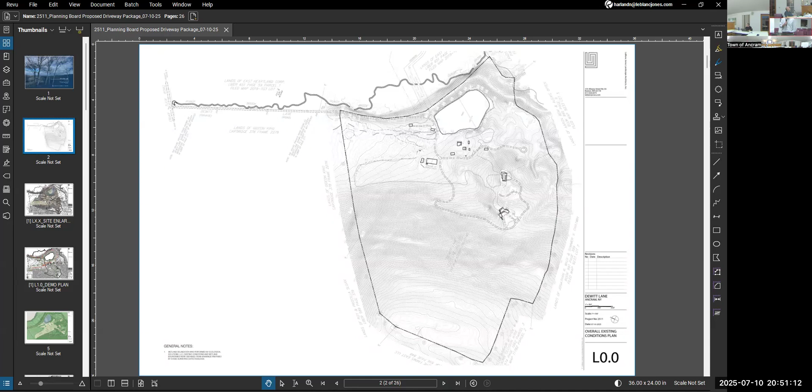There is a bigger screen. This is a 120-acre parcel of land, accessed via private drive off of Friar Tuck Road. DeWitt Lane is a right-of-way through an abutting property, sort of parallels Punch Brook. It's basically flat and starts to ascend when it gets to our lot line. As you can see, there's a pond as you enter into the site.

Next slide please, Harlan. How wide is that drive? The drive is approximately 12 feet in width. Our proposal - I'll show you momentarily - there's a small segment we want to reconstruct. The piece that is the right of way, we'd like to repair. It's in disrepair, we would fill it.

It's a right of way. What does that mean? It means you have a legal piece of paper that says you can drive on it. Yes, that's correct. And it's written in beautiful cursive from decades and decades ago. But yes, there is a legal right of way to provide access to this 120-acre parcel.

We took drone photography - that's what you see on the monitor now. The thing I'd highlight, and I'll do it at a larger scale in a moment, is you can see a diagonal line running through the site. That line is basically where we'd like to put a roadway. So there isn't an existing drive there - that's the path of least resistance that the former owners were using to access the site. Yeah, so here, I'll do it on paper.

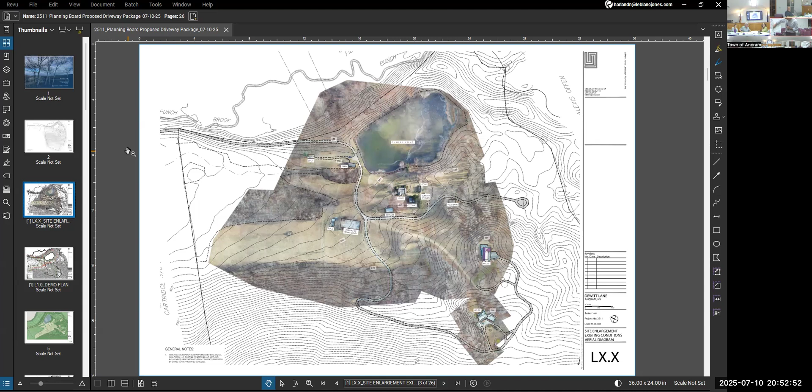So this is just a worn path through mown lawn area.

So what happens is, I'll do this slide in a little bit more detail. There are currently 3 dwellings on the site. There's a house that overlooks the pond, a house mid-slope at about elevation 705, about 100 feet higher than the lower house at elevation 600. There's an upper house at elevation 730. All of those 3 buildings are existing.

This building is currently being renovated, the mid-slope house as I'm describing it. The oldest of the 3 structures is the house overlooking the pond. It includes a number of accessory structures. The surveyor has called them a coop, a summer kitchen, 2 cottages, and a pole barn. In addition, down on the lower, flatter portion of the site, there's an existing abandoned pool and an existing abandoned tennis court.

The upper house is accessed by a roadway that traverses through the field and then winds through a very steep, narrow, tight radii road. It's really unsafe. I think it probably originated as a logging road, and now it's the catalyst for Lily and Daniel wanting to build a new, safer road. As it exists, you ascend all the way to the top of the hill and then descend down to the mid slope.

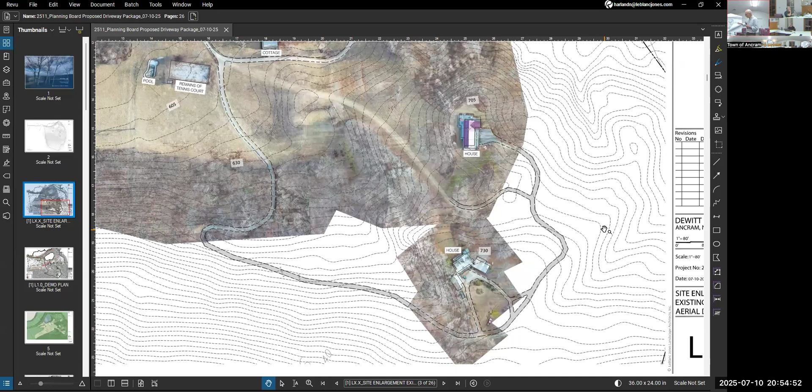The entire 120 acres. So the next thing I wanted to talk about is the current plan for preservation or removal of structures. The things shown in red are the things the owners, because of their current condition and/or the desire to have a safer road up to the dwellings they're preserving, would like to remove to build a new entry drive. So all of the structures down in association with the pond would be demolished.

Additionally, they're proposing to remove the existing swimming pool, and we would like to remove the tennis court where it is and discuss with you this evening an alternate location for a tennis court by the house. The pond house is being demolished also. That's correct, it's sort of beyond repair.

Is that green line there the same as the white line that you showed us previously? It is. So what we're showing in terms of red and green: the red section is the portion of the driveway that would go away. We'd like to abandon what's rendered in green, or no longer use it as a roadway. It would essentially become a trail. We'd allow it to naturalize.

Just to triple check, the two houses that are not red, those are both plans to persist? This house is currently being renovated. This house is currently not occupied and really needs to be renovated to be habitable.

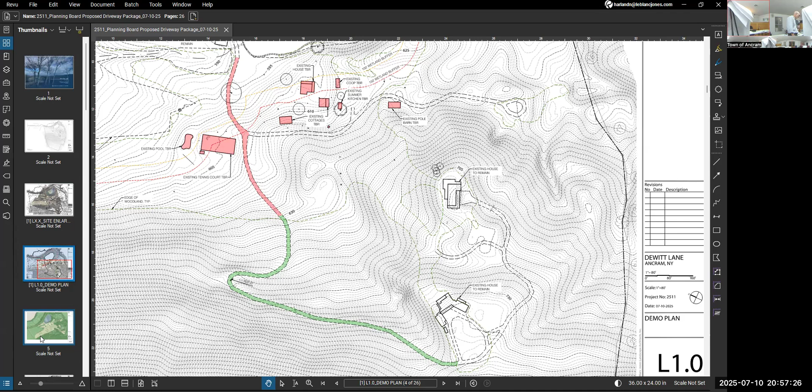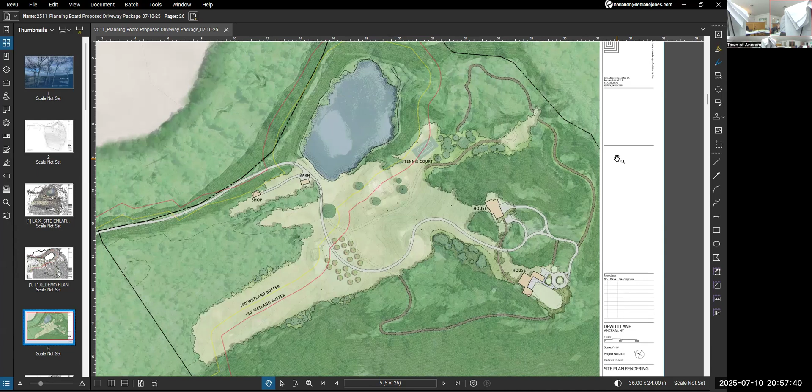I got it. So this is what we're proposing, okay? So those structures that I described are proposed to be demolished. The existing pool and the existing tennis court would be demolished. We would build a new driveway. I'm going to show you in a lot more detail what it is that we're proposing.

That drive would sweep around an existing knoll, and then it would ascend that path that I showed you where they've been driving historically, kind of a straight line here. It's very steep because it goes up and over the knoll. We'd like to sweep around that and ascend up to the house. Currently there's only a lower access to a basement level garage. We're proposing a spur that would provide access at first floor level.

In some future phase, we would talk to you about the rest of the driveway and the house up above. This is our master plan.

The other driveway is getting abandoned, the lower one. This driveway through the woods that's very steep. It's a logging road. I've been there, it's crazy. I've driven them. Yeah, insane.

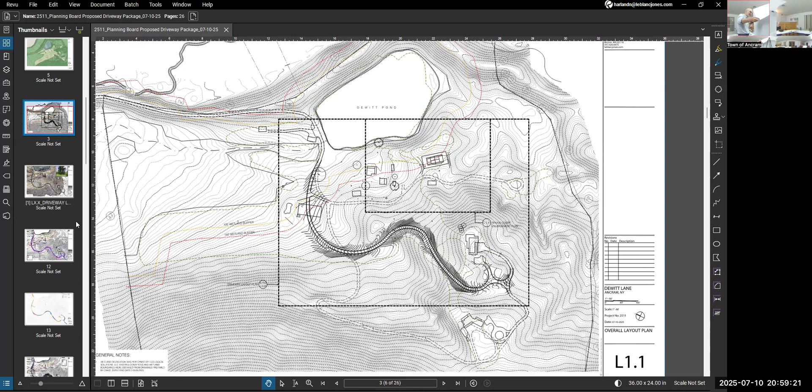One reason is there's a beautiful mature red oak. If I could fold this further, you'd be able to see that. There's a lot of woods on the site, but there aren't a lot of freestanding trees. We'd like to give that some breathing room.

We'd like to provide a much gentler curve. If we sweep out the way I've drawn it, it will allow us, because we have a longer length and we're not going straight up the hillside, to have gentler slopes. As part of the project, we're proposing to disturb this area anyway because we're removing the tennis court and the swimming pool.

I think I have a better plan to show you the relation to the buffer. The yellow line is the 100-foot buffer, the red line is the 150-foot buffer. You can see there's a spur that we're removing. We're essentially proposing to pivot that so it goes through the tennis court, where the slopes are a little softer. So this piece is within the buffer zone, but there's no work within a resource area.

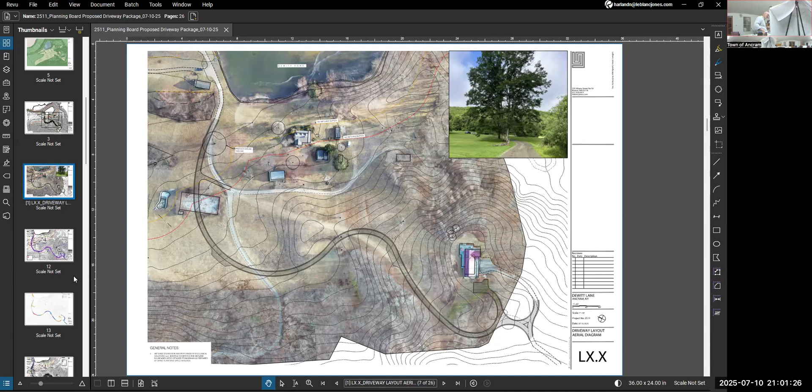This plan shows you horizontal alignments. I'll do it quickly — they're all generous curves. Your guidelines say radii shouldn't be smaller than 40 feet. The smallest radii on the plan is 69 feet.

The guidelines describe that if you have a private drive longer than 500 feet in length, you should have 15 by 50 foot pull-offs for fire trucks, and those are there. At the top of the hill, we have the ability to use these driveways as hammerheads to turn around. So the horizontal alignment and pull-offs for emergency vehicles are addressed on that drawing.

This is going to get a little trickier, but I'll make it as simple as I can. You can see we have a key — we have colors.

What I'm showing you is the existing topography within the proposed alignment of the drive. By the time I get to blue, I'm greater than 12%. Our site is relatively flat, obviously very flat where the tennis court is. When I get into the red slopes, the existing slopes are 10 to 12%. When I get into the blue slopes, I have some very steep slopes. When I get to purple, they're even steeper than that.

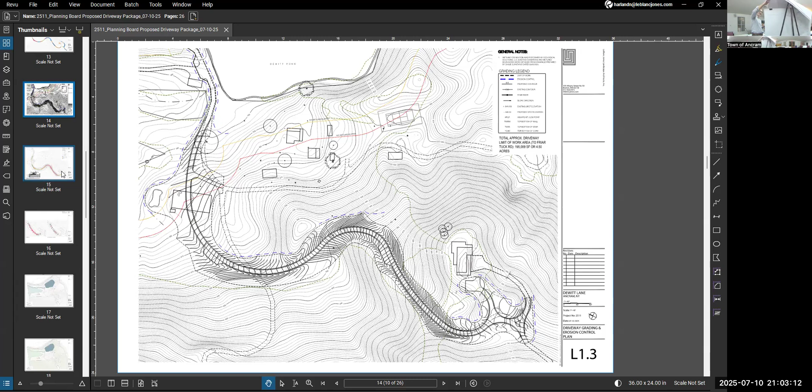How do we manage that? That's the next drawing — this is the grading plan. I'm going to show you the colored version. This is the proposal. You saw my purple scheme — there's no more purple. There are some 11.5% slopes that are proposed.

So this is what we're proposing. It's relatively flat. We reach a point where, as you're coming around this bend, the roadway is kind of paralleling the contour, as you can see.

These are 1-foot contours. This is the 660 contour, basically right on top of the 660 existing, meaning we're meeting existing grade, from 660 down to 630, where again we're basically right on top of the existing grade. This is infill. To flatten the conditions from elevation 660 down to 630, we're filling. To accomplish this, we have a fill that is as much as 7 feet.

Part of what is advantageous about the knoll is we're capturing that landform. We have an existing cleared area — there are no walls, and we're not cutting down trees. If I go back to the aerial photo, you can see the lines here in green, this is all moving through the field. The existing road, or path that people have been driving, is a corridor between two wooded areas.

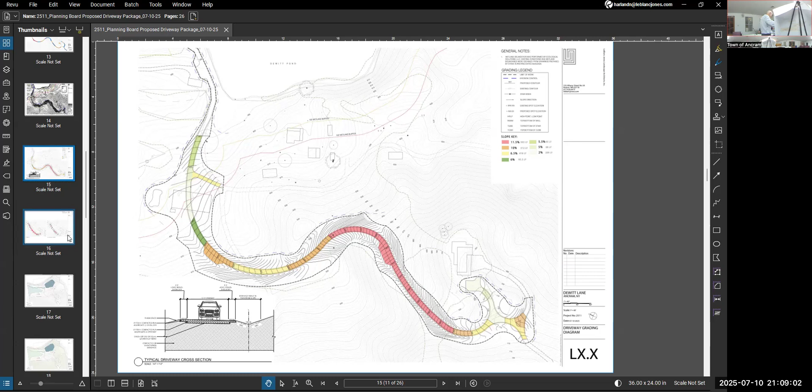I don't have the detailed study that you appreciated in my prior drawing, but what we've done is looked at — this is what an 11.5% looks like, and my maximum cut is 4 feet. If I tried to go to 10%, I have a maximum cut of 8.5 feet, and that cut is on the high side. It's going to expand the corridor I have to grade, and I'm going to cut down a lot more trees. There really isn't going to be a way, when you put in an 8-foot deep canal, to make it feel like it belongs with this topography.

I know, I hate seeing it. Colleen, could you put your firemen on for us, please? What do you think? I'm kind of at a loss.

We're trying to improve it, but it's not making code. New York State Fire Code requires 10%. You can get a variance, either through the state or local. So I don't think you can.

When we met with Ed, he suggested it was discretionary, and I won't step beyond that, but that was the word he used. Discretionary for either himself or someone else within Ancram. And that's where I'm not going to misstep.

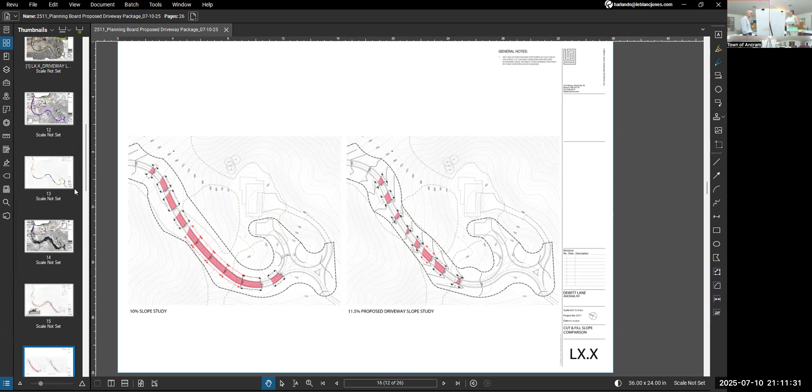I need the purple plan. I mean, that's the question to talk to - you get a variance if you can fight the fire. Right, and it's not just our equipment. If there's a fire there, we're gonna have multiple jurisdictions. But it's not just our equipment, and that's why the turnouts are created based on the maximum amount.

Oh, sorry, Melvin. Sorry, Melvin. So, oh, okay, sorry. I mean, ideally, you do have the turnouts, which is awesome. That's really good. The big thing about the turnouts is they have to be maintained. If you don't maintain them, they're just useless - including plowed, mowed, everything. Given what you had before, this is a better solution.

Can we do it? Yeah, we can do it. But we have to do it. But who approves it? It would have to be either Ed or it would have to be a variance for the slope. Is that what you mean? We're gonna approve this as a something, or no? Somebody has to approve it. Oh, you want to know what it's for? So, steep slope - that could be why it's here.

You mean like what is your question? Yeah, like what's our job on this application? Right, is that what you're questioning me about? It sounds like it needs a variance. It would probably be to exceed the slope of the New York State Fire code. Right, who has to approve that? Who does that variance? It can either be the state fire code officials, or it can come from the local fire code - so David Boyd. But my guess is he won't do it, because he's been instructed, I think, by the fire district - they don't want that liability. It's a liability. Yeah, sure. The reason it's there is for health and safety and life safety. So that's why it's there.

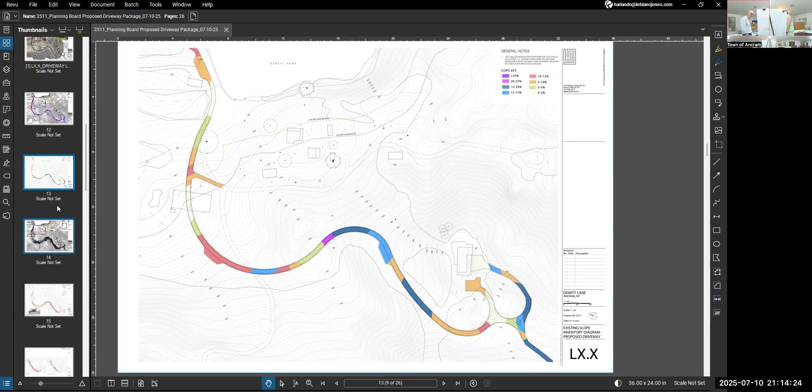There are a few unique things about it. One, we're not here asking to build a building that requires this driveway - this is kind of the master plan, retrofit. My first concern is you didn't show the other driveway to the other house. And even if it's phase two, I think it should be part of the master plan. No, there's another house. Yeah, it's a little further.

We need right here - is that what you're talking about? In part, it's driven by economics - they're only renovating one house at a time. But it's a considerable distance away. Yeah, and I think this house, no, this house way over here, it's not close.

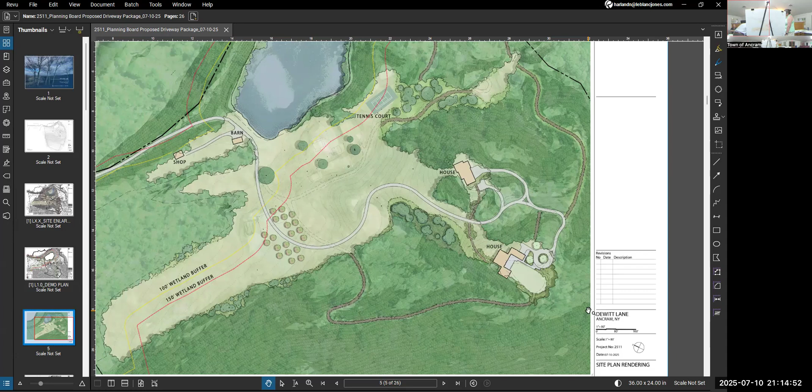One of the drawings shows the two houses, connected by an existing driveway. But since you're not renovating the house right now, we'd renovate from this point up as part of a future phase. You can see when we drew this, we made it phase two, so it's part of the approval.

Excellent, I would do that. Thank you for your advice. Otherwise, one of the things to sweeten the pie, whether you want to do it or not, in these situations, if you offer to sprinkle the dwelling, it goes a long way.

The one thing you're lucky about is as long as we've got access, we're pretty good, but you're a long way from where our trucks have to come from, so it's a consideration to think about. This is certainly a much better and probably safer option. We don't want to hurt you, we want to help you, but it doesn't sound like we're making an approval, we're making a recommendation.

I don't know, but again this is just an informational thing. I can go back to Mr. Ferrato and pursue this further. I don't know what he wanted from us other than advice. I mean, is this something?

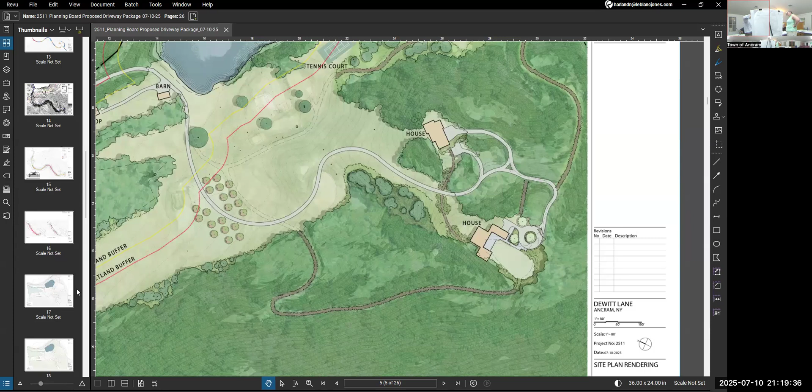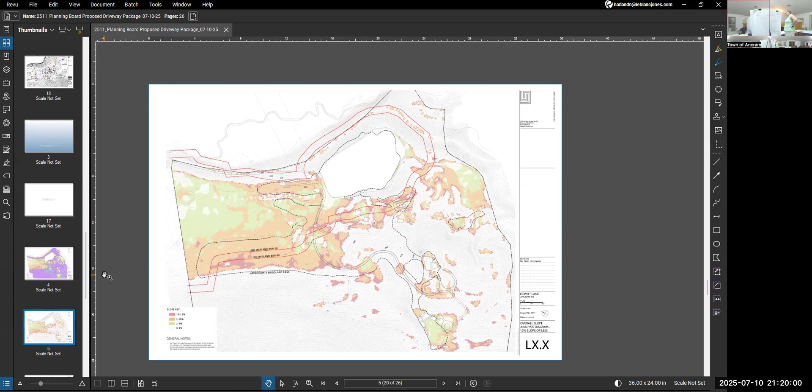This plan is showing you areas that aren't wooded and aren't wetlands and are flatter than 12%. What you can see is there isn't a lot of our site that satisfies those criteria. I'm showing you this because we'd like to build a tennis court, and we'd like to do that where we're obviously not going to be in a wetland and where we didn't have to cut down a lot of trees. We'd like to do it in these light green areas if we could, and the area that seems like the best choice is partially within the 150-foot buffer.

So one of the things I think is important to see, like your map, is that wetland from any wetland delineation? It is. Mark Rominsky went out and flagged all the wetlands. So your identified maps are all accurate? Yes, this was done within the last 3 months. Nice.

All right, so now there's two. There's a tennis court, a portion of which is in... Yeah, that's right. What kind of court surface would it be? It's likely an asphalt court.

In terms of where it's sited, there's a knoll between it and the pond. The tennis court would pitch uphill, away from the pond, and we would put in stormwater management to capture that water. You could do something creative within asphalt.

The clients are, for lack of a better adjective, entry-level tennis court players, so I don't think they aspire to other surfaces like true clay or some of those others. You can drive to Copake and play for that.

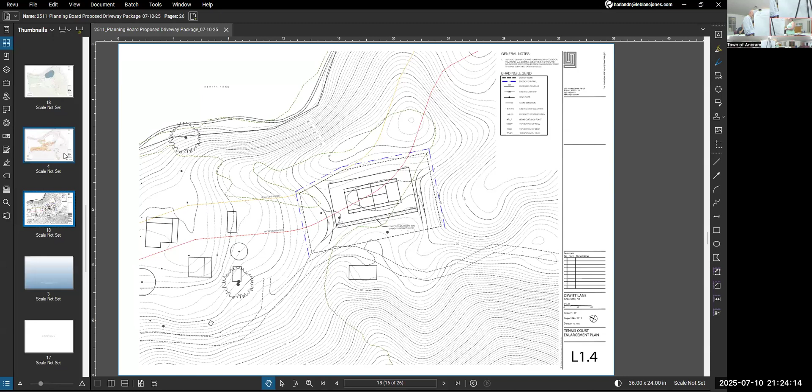Except maybe you won't be able to see the pond. But no, you can't see it as vegetated now. So it would be to create a new flat area, instead of more of a half cut, half - so just that, to create it.

So that wetland, the 100-foot wetland buffer line, drops way down. So what is that wetland like? Where is that pond, and then it's the stream that outflows from that. Oh, so that dashed line - this whole area is sort of a corridor. It's really quite wet back there.

And then that's Punch Brook on the other side. The area that is cleared is the area that's not steep and not wet - that's the nature of this piece of land. How big are the little houses there? Being in one of the fire trucks, we got to a certain point, and I'm looking and I'm going, we're going where?